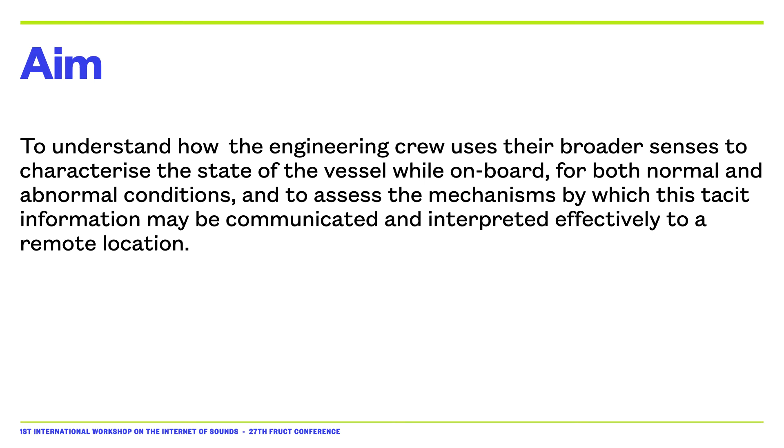While there are a few options to choose from, we examined how virtual reality was used and how we could make that possible so that engineers will experience the engine room from a remote location. Since there was an industry partner, we believe that any made-up scenario with made-up data, including audio and graphics, would not have been realistic and would have resulted in a rather unconvincing outcome and not reflect the industry.

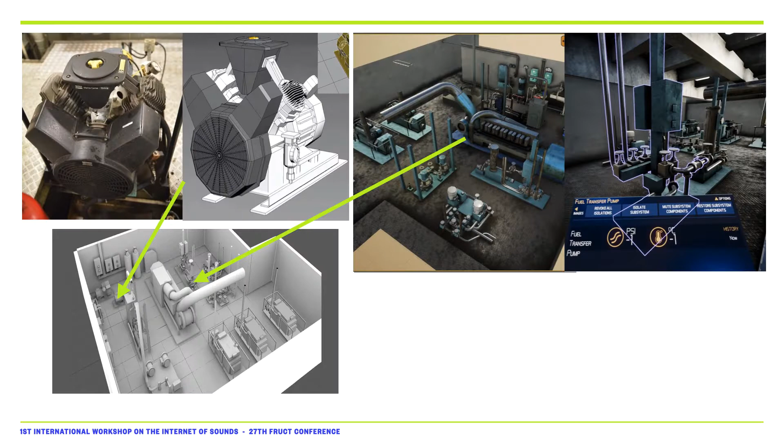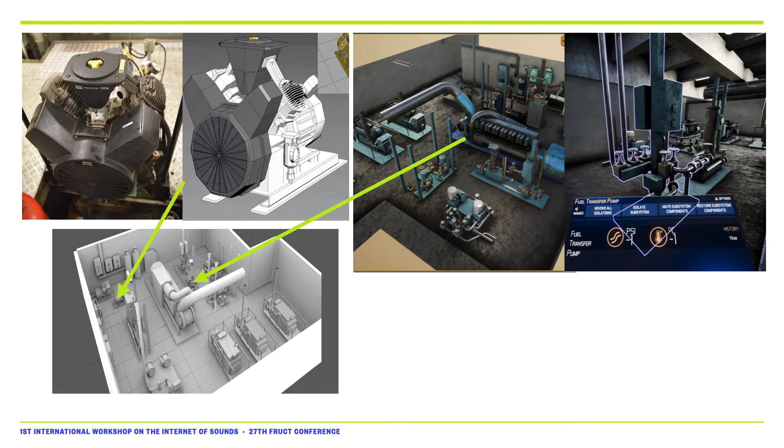Here again you can see on the top left the compressor and then the simulated version, and also the arrows identify where each item is in the engine room, and you can see how the early version became the final version on the right hand side. And also the far right picture shows the viewer's point of view, so how the engineer would look at the engine room when they put the VR headset on.

To understand better how a maritime engineer works, there are a few universal characteristics or general rules that we can go through. When there is an alarm, an engineer assesses the criticality of the alarm and acts accordingly. The systems do not monitor every single component in the engine room. Alarm systems tend to provide only the basic information to the engineer, such as tank level low, and depending on the alarm, an engineer enters the engine room to investigate further the cause of the alarm and gain more information about the system in question.

The loudness in the engine room is more than 100 decibels, therefore ear defenders are required. Engineers inspect the engine room at the start and finish of their shift, what is known as rounds, to identify and prevent any major failure. For example, during rounds, an engineer might spot a leak, which at the time might be too insignificant to trigger an alarm, but it will develop in the future and it will cause more damage.

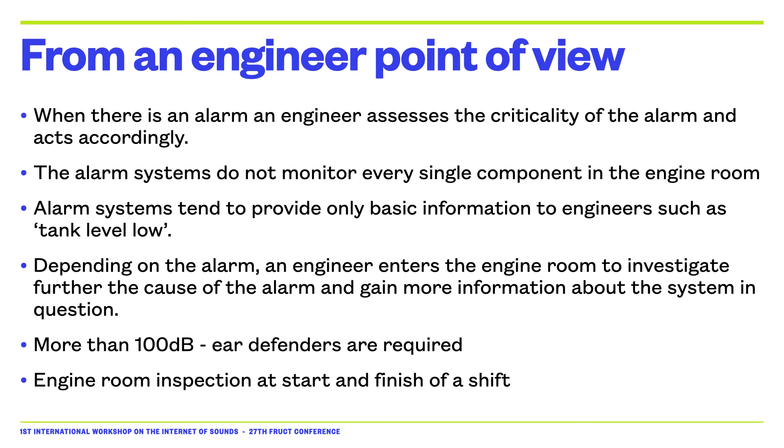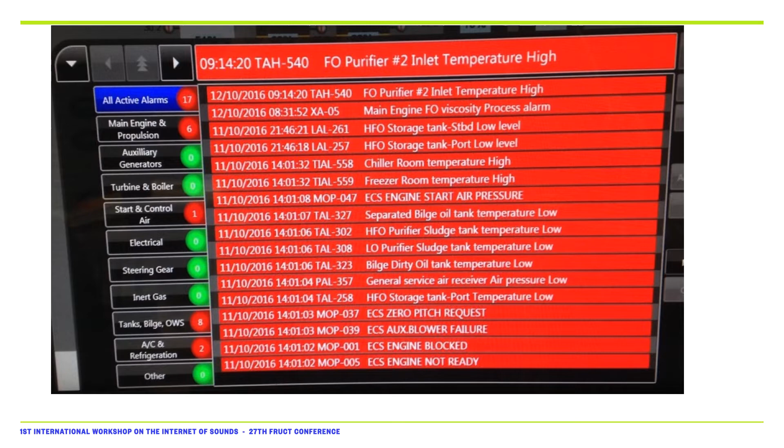We set up a server in order to enable the use of real data and audio as if they are streamed from a real uncrewed vessel into the control center where the engineer will be experiencing them remotely. All systems in the engine room were recorded while in operation, and the server was controlled through a web interface that enabled us to introduce any failure that we wanted for the user testing.

The user is able to experience three sets of data. That is current data, so that's the current data at this given time. The baseline, which is what's considered to be normal values when in working condition for that particular component, and the history, which refers to the values of the component up to 10 hours before.

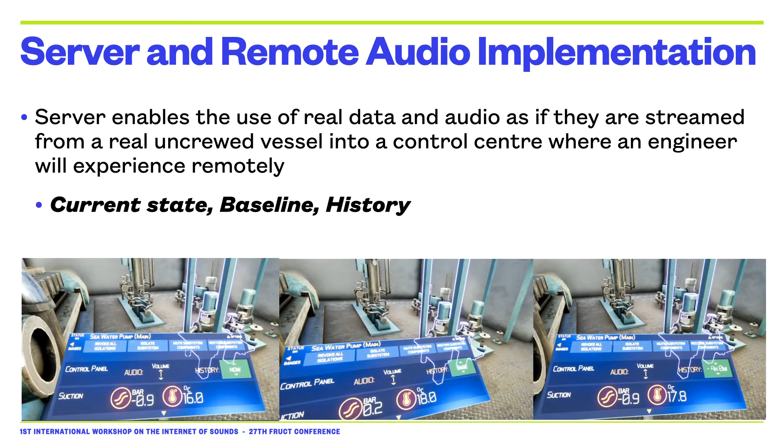This enables the user to have a good overview when signs of failure might occur, or how they developed within the past 10 hours, and how they might be associated with other changes of other machinery within the engine room.

The main focus of this project was how audio and sound could be used as a diagnostic tool. However, in order to test if an engineer could identify a failure through sound, we had to record the sound of a failure of all the components for all possible failures. This was an impossible task, as in theory we had to wait until a component in the engine room would break in order to record it.

In order to get through this, we used the original audio from the recording, and we added sounds of a particular type of failure based on that component. This includes sounds from failures of cavitation, bearing, rotor, jamming, misfire, and knocking.

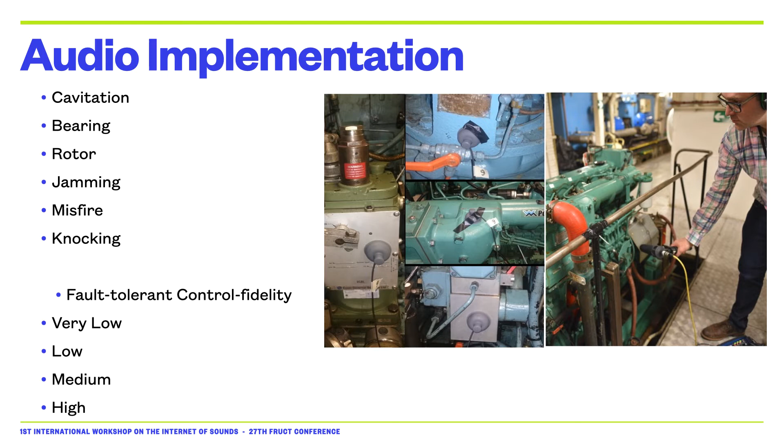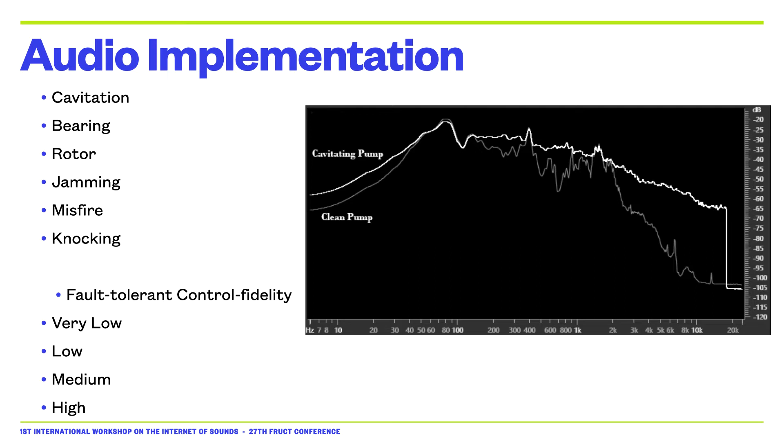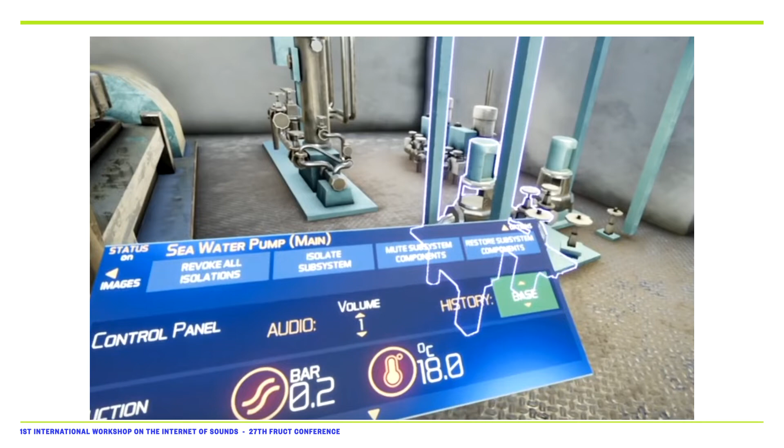We also provide the option to isolate audio from the selected component from other sounds in the engine room to be able to focus on that particular component, something that is not possible in the real engine room.

For the user testing, we ran a usability test with 7 marine engineers with an average of 27 years of experience. They were asked to assess whether or not they felt there was a potential system failure, what might have caused that failure and possible further actions, or if the system was operating normally. Each user ran through 4 different scenarios, 2 of which had faults and 2 of which were running as normal.

The audio was spatialized using a binaural encoder for the built-in HTC Vive Pro. Thus, they were able to experience and feel the audio in a similar manner as in the actual room.

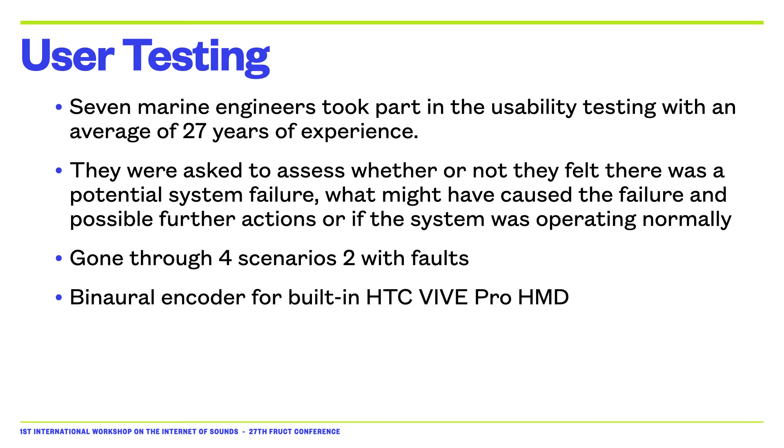4 out of 7 engineers were able to identify if something was wrong and what might have caused the failure, but stated that they would need more time to investigate further in order to identify the exact type. The remaining 3 participants diagnosed the correct failure.

The overall response focused around the immersive features, and sound was discussed in 53.9% of coded phrases. While we acknowledge that the focus of this project was around the implementation of audio, and it is interesting to see such results, we assume that the high percentage of sound was due to the way it was experienced and presented to the engineers, which is something that's impossible to do in the actual engine room. For example, the ability to isolate the sound of the machinery from background noises.

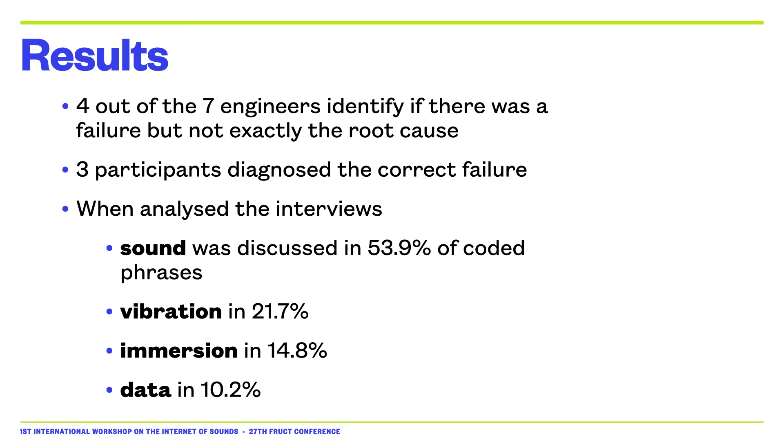The following is a short excerpt of a video recorded through the headset of a user where he tries to identify the failure.